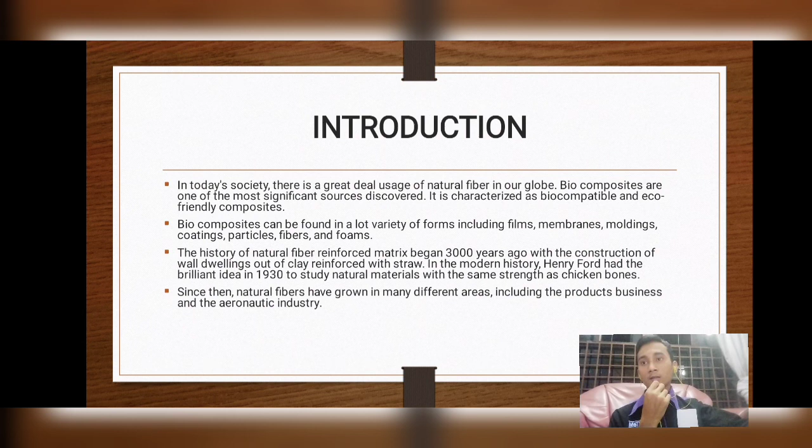and foams. The history of natural fiber reinforced composite began 3,000 years ago with the construction of wall dwellings out of clay reinforced with straw. In modern history, Henry Ford had the brilliant idea in 1930 to study natural materials with the same strength as chicken bones. Since then, natural fibers have grown in many different areas, including the product business and the aeronautic industry.

Coconut fiber, from Cocos nucifera L, is derived from the husk of a coconut. Although being a secondary crop, it has a major place in terms of output. Coconut trees produce 50 to 100 fruits every year, which take a year to mature. The husk of the coconut covers the fruit, which includes both the interior exocarp, the edible portion, and the outer mesocarp, which has the fiber in it.

The coconut pith is made up of non-fibrous parenchymatous husk cells that account for 50% to 70% of the overall weight of the husk. And there are two types of coconut in Malaysia, which are pandan and matag. The preparation of the region is the first step in processing each coconut for matag and pandan.

Also, there are over 300 eco-types of coconut, and the quality and quantity of fiber vary. The length and the thickness of the fibers vary even within the same type. And the best fibers are said to be found in the husks of near-ripe to ripe nuts.

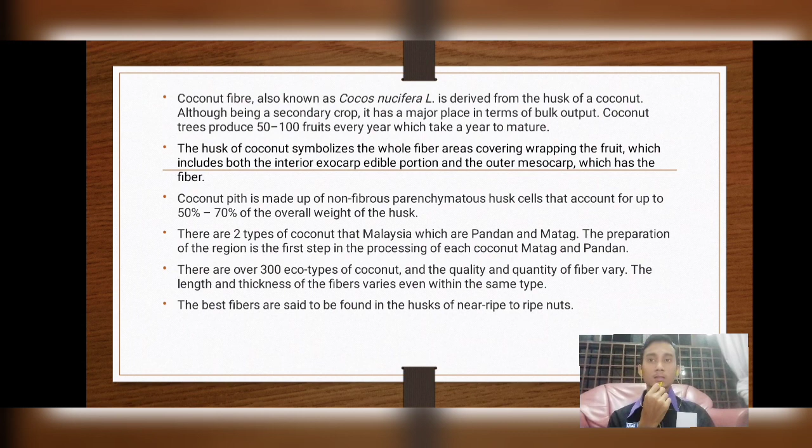The next slide in my presentation is about the methodology. Methodology underlies the approach and reasoning of the research. It reveals the study methods that were used in the research as well as the ideas or concepts in order to design a strategy that is appropriate for our goals.

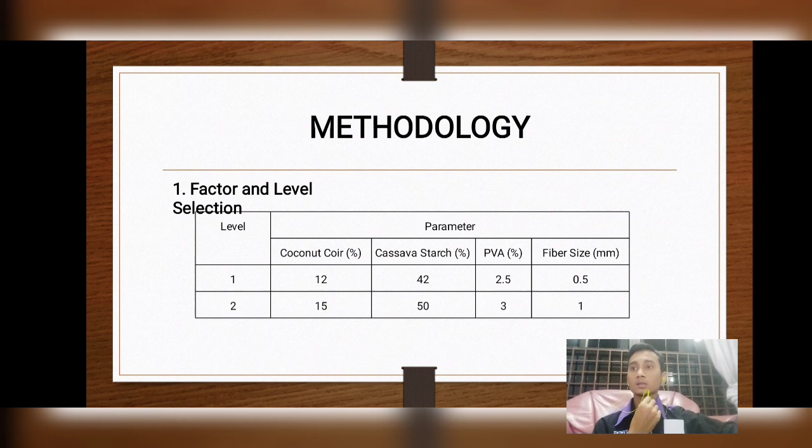The first step in the methodology section is the factor and level selection. From the table in the slide, there were two levels involved, which are 1 and 2. Level 1 represents the minimum level, while level 2 represents the maximum level. And there were 4 factors in this study. The first one is coconut coir, second is cassava starch combined with glycerol, third is PVA glue, and the fourth one is the fiber size. All of these 4 factors are stated in percentage except the fiber size.

The second process begins with the sample preparation. Sample preparation begins by preparing the materials involved to form a composite, which are coconut coir, cassava starch combined with glycerol, and polyvinyl alcohol (PVA). A total of 8 samples need to be provided for each test, which requires a total of 16 samples for 2 tests.

The first step is the mixing process. The cassava starch and glycerol are weighed at 42 grams. Then the mixing factors must be put in a cup or bowl together. After that, it must be blended so it is equally mixed using the blender machine. Second is adding the fiber into the mixing element. The fiber used is the coconut coir.

After both elements are prepared, the coconut coir, which has been cut to size, is weighed at 50 grams and mixed together with the blended cassava starch and glycerol. The mixing process for these three factors must be very thorough to avoid the sample produced becoming ruptured. Then the PVA was weighed at 3 grams and added into the mixture for it to be bound together.

The step is preparing the mold. After finishing mixing all four factors together, the mold must be prepared for the factors mix. For the element mix to be placed into it, the mold must be cleaned first to remove all the residual objects around it. Then the mylar polyester film is prepared to be placed at both the upside and downside of the sample on the mold. After that, the mixed factors were put into the mold.

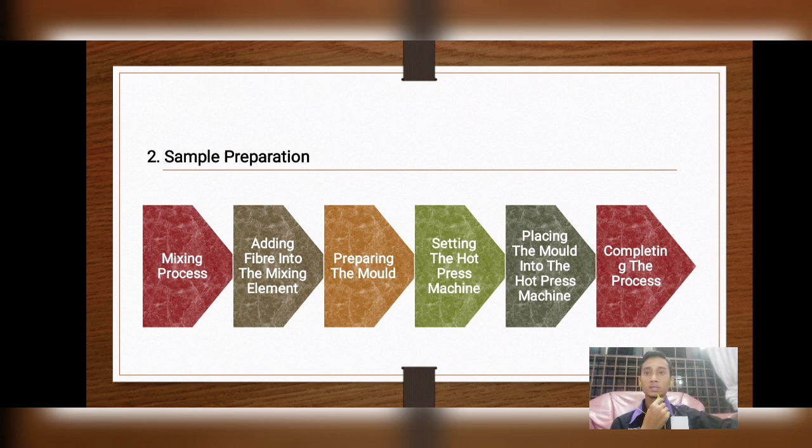Okay, the third process in the methodology is the testing. The testing is done to determine what is predicted to be seen and then compare it to what is actually observed. In this research, two different tests were done, the Tensile Test and the water absorption test, in order to obtain the result required. Both of these tests use their own ASTM.

Okay, the first test is the Tensile Test. The tensile test is done to determine how strong a material is and how extensible it may be before the breaking point occurs. In this research project, the Tensile Test is conducted according to ASTM D638. According to ASTM D638, the suitable speed rate for the testing is between 5 to 500 mm per minute. But in this test, a speed rate of 5 mm per minute was used based on the fiber required. The specimen takes between half a minute to 5 minutes before it ruptures due to the stress applied on it.

Okay, the second test is the water absorption test. The water absorption test is also performed as a moisture test. It's also one of the tests conducted in this research project other than the Tensile Test. This test is done according to ASTM D570 for coconut coir. The first process in this test is cutting the sample into 1 cm times 1 cm size. There were 8 samples needed in this test.

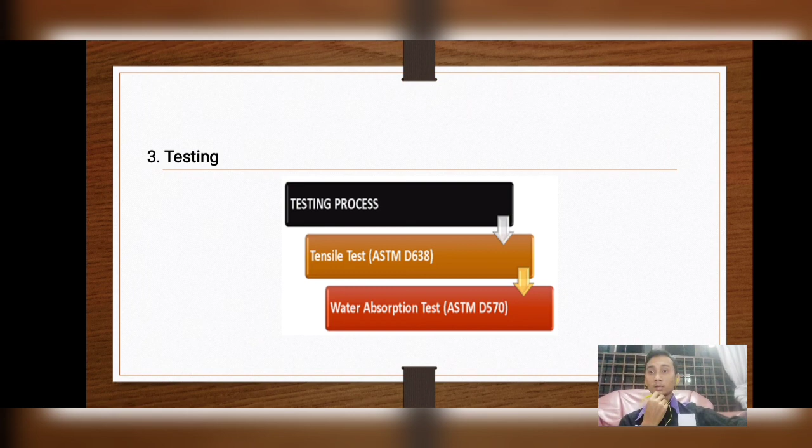The next chapter is about the results and discussion. In this chapter, it will discuss the results and data obtained from the Tensile Test and water absorption test that were carried out. This will discuss the mechanical and physical properties of the natural fiber composite contained in the coconut coir. All of the statistical analysis is carried out and the discussion is based on the results obtained from the Taguchi method.

Okay, the first result is about the effect of different material parameters on tensile strength. This tensile test uses specimens with different parameters applied to them. The highest value for ultimate tensile strength is sample number 8, which is 10 MPa, while the lowest ultimate tensile strength is sample number 1, that is 0.3 MPa.

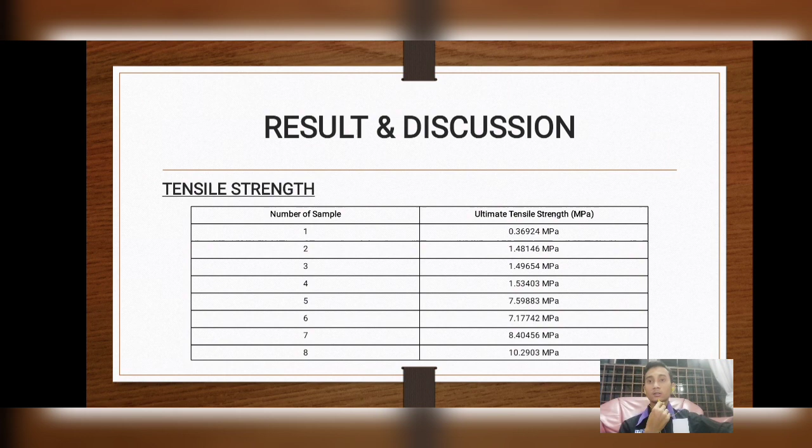These differences occur because of the increase of fiber and the composition of the other materials. The coconut fiber increased from 12% to 15%, and the amount of cassava starch combined with glycerol increased from 42 to 50%, while the PVA increased from 2.5 to 3%. And because cassava starch and glycerol have an excellent adhesion property, a high tensile strength is required to break the bond between the matrix composition and reinforcement.

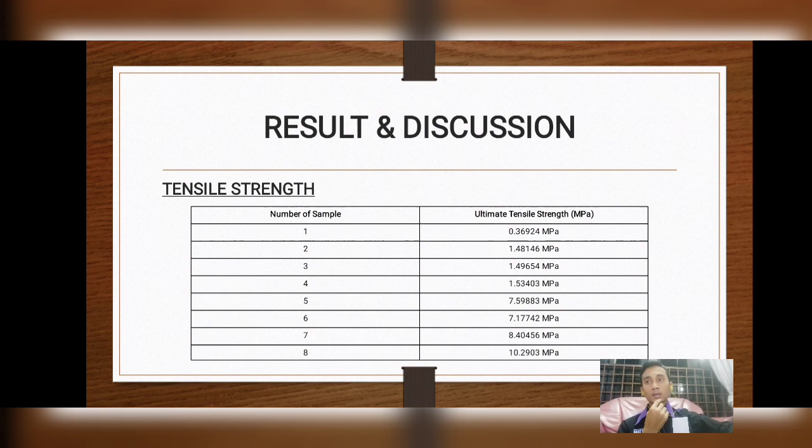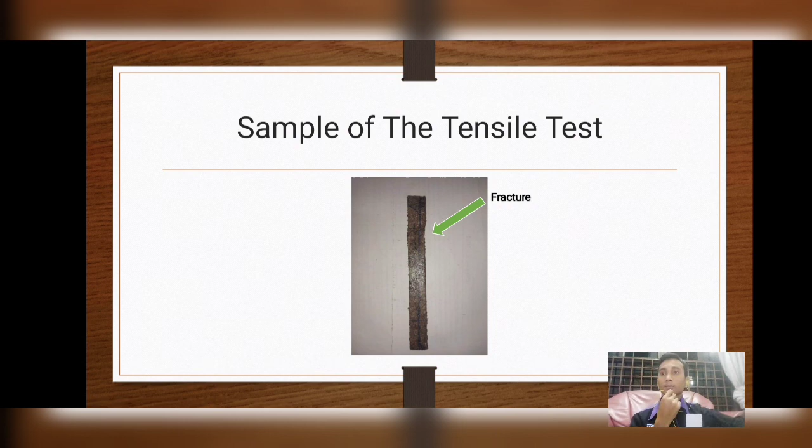The second result is about the effect of different material parameters on the water absorption test. The water absorption test is one of the tests conducted in this research project other than the tensile test, and this test follows ASTM D570 for coconut coir. The results obtained for the water absorption test were slightly different between minimum and maximum parameters. Based on the observation, the average weight for the minimum parameter samples increased after the experiment.

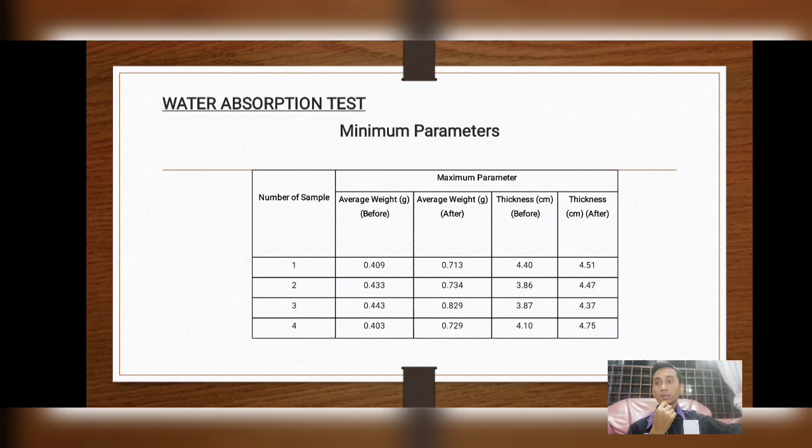From 0.3 gram it turned into 0.7 gram, a difference of 0.4 gram between before and after the experiment. And the thickness of the sample increased from 4.6 cm to 5.49 cm, making it thicker than before the test began. For the maximum parameters, the weight also increased from 0.4 gram to 0.7 gram, a difference of 0.3 gram. The thickness also changed a bit from 4.4 cm to 4.5 cm.

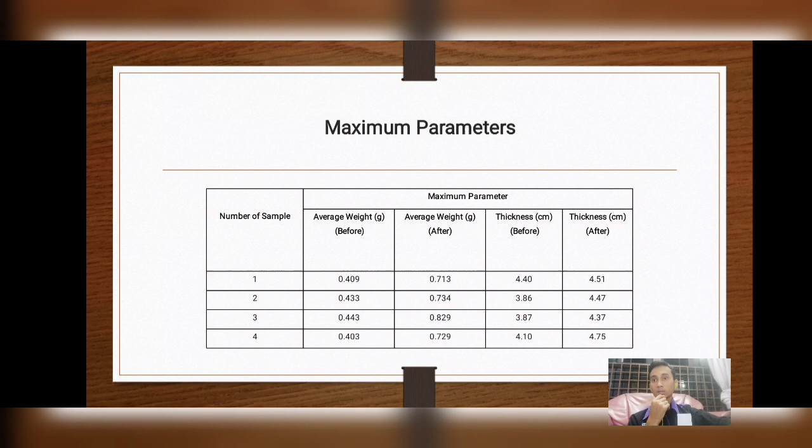This occurs because of the amount of water absorbed into the reinforced composite during the 2 hours of the water absorption test. And here is the sample of the composite for the water absorption test, before and after the test was applied to it.

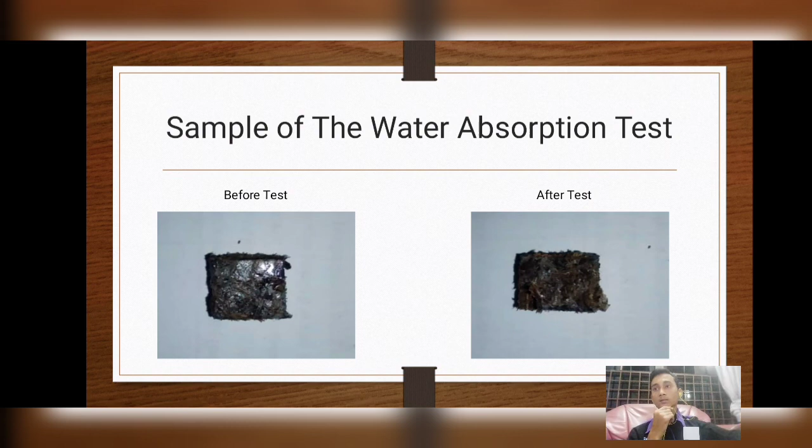The next result is about the analysis of results by the Taguchi method. Minitab software was used to evaluate the significance and interaction between the parameters of the experiment, and also to identify the optimal combination of parameters for the natural composite. Okay, the figure above shows the response table for the signal-to-noise ratio for the water absorption test and the tensile test. The signal-to-noise ratio is larger is better, and there were 4 ranks included. Rank number 1 describes the best factor affecting the composition of the fiber.

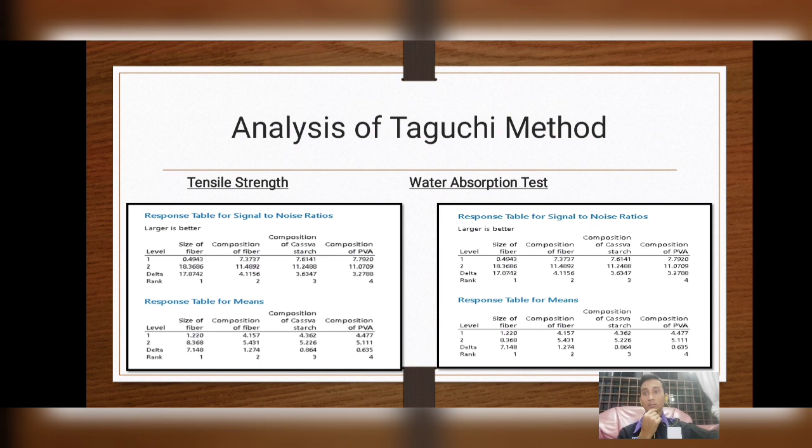Okay, measures of robustness are used in Taguchi design to discover the characteristics that decrease product or process variability by limiting the influence of uncontrolled factors, which are noise factors. Design and process characteristics that may be manipulated are known as control factors. Noise can only be regulated during experimenting and not during manufacturing or product usage.

Lastly, for the conclusion, basically, this research focused on the investigation of mechanical and physical properties of natural fiber reinforced composite, which is coconut coir. The analysis results are very important to investigate the optimal parameters for optimizing the effect of matrix and reinforced composite on the composite properties. A two-level, four-factor full factorial design of experiment was chosen to conduct the whole experiment using the Taguchi method.

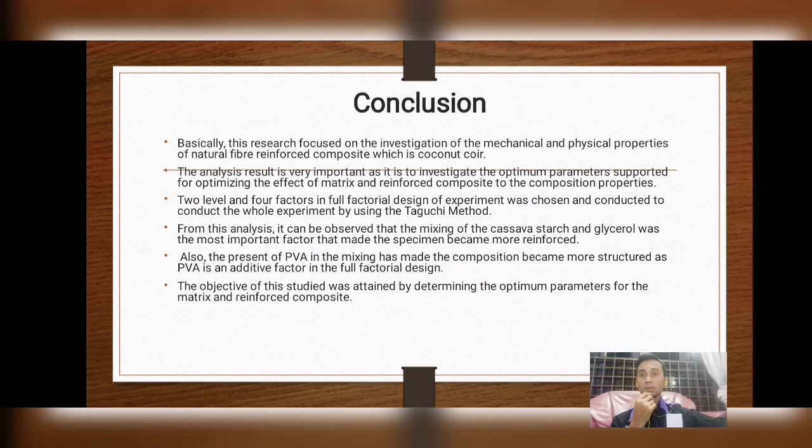And from this analysis, it can be observed that the mixing of cassava starch and glycerol was the most important factor that made the specimen more reinforced. Also, the presence of PVA in the mixing made the composition more structured, as PVA is an additive factor in the full factorial design. Okay, the objective of this study was attained by determining the optimal parameters for the matrix and the reinforced composite. Okay, that's all from me.